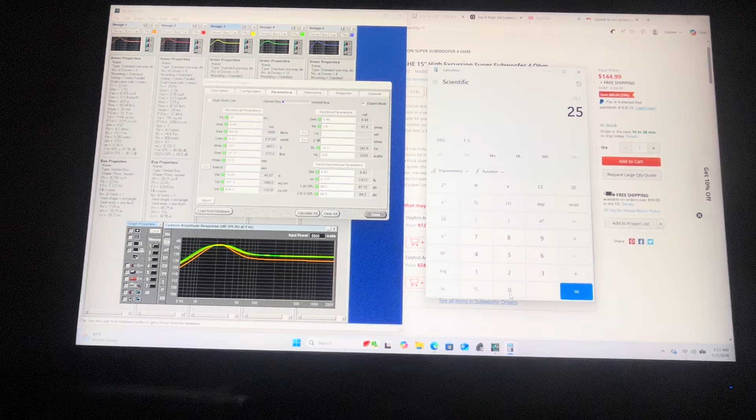So we're definitely way overpowering these 15s in order to get them to represent the same peak output. So not only is it hard to fit 11 15s in the enclosure space we have available, but because they don't handle as much power, that also makes me think that maybe I jumped the gun. I think these are rated at 250 a piece. Let's do the calculation here. 21 times 250. Yeah, it's roughly the same amount of power for the 12s. So I think graphing the 12 versus the 18 is pretty realistic. However, this green graph for the SDR 15s is not as realistic.

The next thing that AI recommended was the Ultimax 15s. They wanted 5. I'm just going to go ahead and model 6. It's a little bit over the budget, but not by too much. It's like 1650 or 1700, but I wanted 6 of them. 5 is an odd number. Let's see how that graphs. That one is here, and we've already talked about this in my previous video. I used this as an example.

So one of the first things I notice is that instead of having a nice smooth wide response curve, it sort of drops off really quickly, and this is almost 100% the way it's represented when I model things if the tuning frequency that we set for the enclosure is below the FS of the driver. This driver has an FS of 29 hertz, and it directly correlates with the fact that we see a much quicker, much steeper roll-off as predicted.

Is it going to affect the actual sound output? Let's see here. Cone displacement. That is the red trace. It seems to want to hit peak at roughly the same time as the 18s. So is it affected? It looks less desirable on the graph because of how quickly this rolls off. Would we ever acoustically be able to notice or experience a difference? I think that this has to do with how far the FS of the driver is relative to the tuning frequency. If you get the two far enough apart, I do think that it starts to give us issues. And I think we'll have a representation of that here.

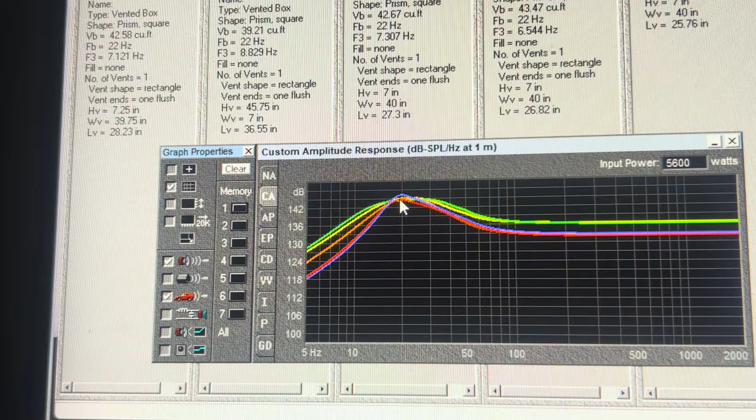Let's see how it models. Where's my icon here? It didn't work. Let's take a look here and plot it. So the FS of this driver is 31.2 hertz. So it's a hair higher. And again, we get that really sharp roll-off. I'm tempted to zoom in here at this point for you guys. Let's see if we can make that work. Let's zoom in so you guys can see this graph a little bit more accurately. We'll start it over.

2 12s, this is how it models. 4 Ultimax 18s, basically the same. Let's do 11 15s. These are the most entry level. How much are they? Something like 120, 130 a piece, but 11 of them. The problem with the way that this is graphed is that they can't handle that much power. They can only handle probably closer to 4,000 watts, which, let's call that 6,000. They would be 2 to 3 dB quieter, roughly. But you can see how that plots.

The next thing that needs to get modeled is 6 15s. These are the Ultimax 15s, which exceed our budget by a hair, but peak output is roughly right there. There's a direct correlation. And then these are the Skar Audio

EVL. Man, I feel really tongue-tied for some reason right now. I'm not entirely sure what's wrong. My intelligence is fading.

These indicate that they would have a peak output that exceeds all of these others right at the 20 hertz range. And for the most part, it models just like the Ultimax drivers do.

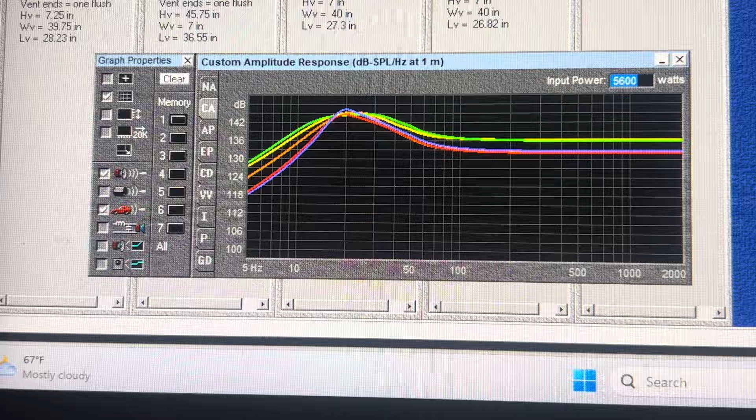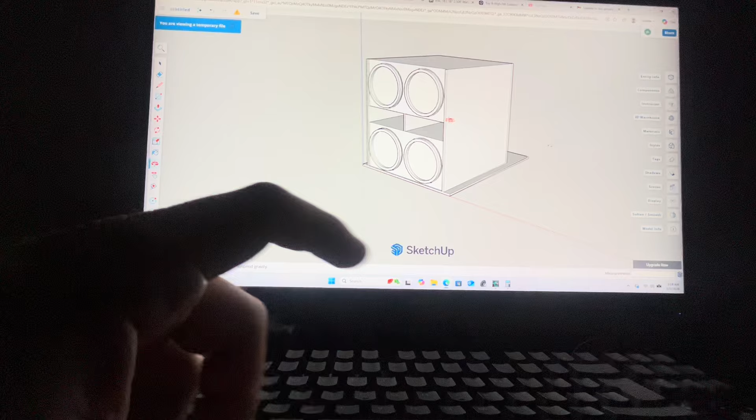Which honestly, based on the simplicity of designing a box for 4 18s, I've showed you guys already, but I've drawn this up. Oh, I'm sorry, I gotta zoom out so you can actually see it. This is a rough drawing. I've already showed you, but this would be pretty easy to build. How do I work my mouse? It'd be pretty easy. 2 18s, a port sideways, 2 18s, pretty simple build, really. Some internal bracing, that's pretty cut and dry.

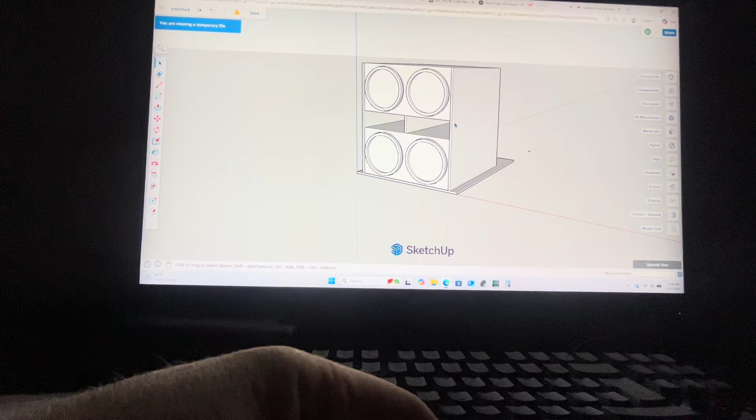That's pretty smooth. I'm sure that with the port velocity this thing would have, it would be windy as can be, and only need 6,000 watts RMS of electrical energy. Under $2,000, $1,500, I can have plenty of amplifier for this application. I think you can get a 6,000 watt amp for under $1,000. So if I double that, I can have a higher impedance configuration, and everything will run really well. Yeah, so I didn't color these.

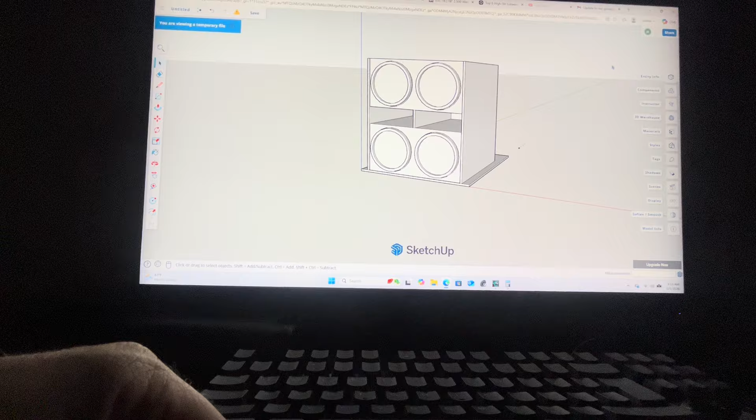My point of showing you that was that honestly, the way the Skar Audio drivers model and the way the Ultimax models, the only reason I would run the Dayton Audio Ultimax is because it's just not mainstream. It's less known, and I'm biased towards their products. I think their lineup is great. They don't stamp logos on their drivers. There's a simplicity and beauty in what they're doing, and I just really like it.

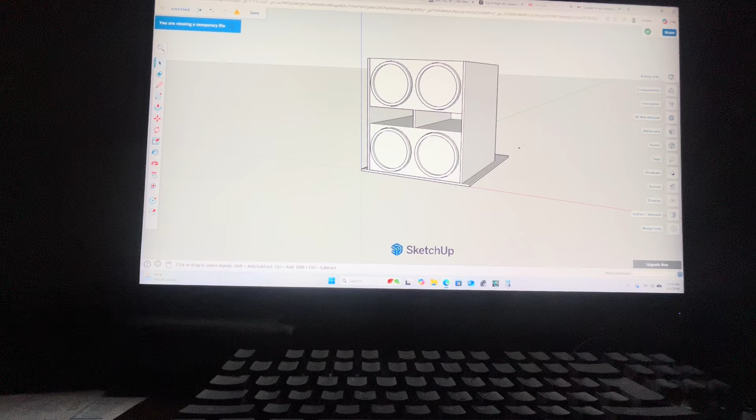Let's pull them up just for fun. Yeah, there's carbon fiber, very clean, they're just very simple. There's a little bit of bling there, a little bit of shiny, but I think it's tasteful. I think it's desirable. I think it's attractive. I noticed something interesting when I was looking at the Skar Audio. The Dayton Audio lineup has dual spiders that are separated, and I think that's a very good design. I believe this Skar Audio series has that exact same configuration.

If we look, I don't know how well the camera is going to depict it. You can look them up, but can I zoom in on this? Maybe I'll just hold the camera here really quick. You can see what looks to be a spider sandwiched below this plastic piece, right? You can see it there clear as day. That makes me think perhaps this design is a similar separated spider, dual spider configuration. I just like that design.

I think having dual separated spiders supports linearity when you're exciting the drivers and moving the thing. I think it's a good design. Obviously, there's tons of designs that only have a single spider, and they work just fine. So it's not a necessity. I just like it. I think if you're gonna do something like that, that's ideal. So what's the point of this video? Back over here.